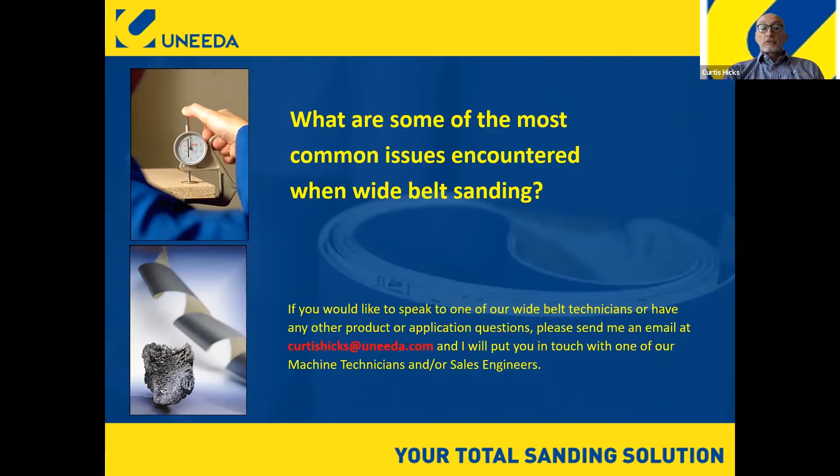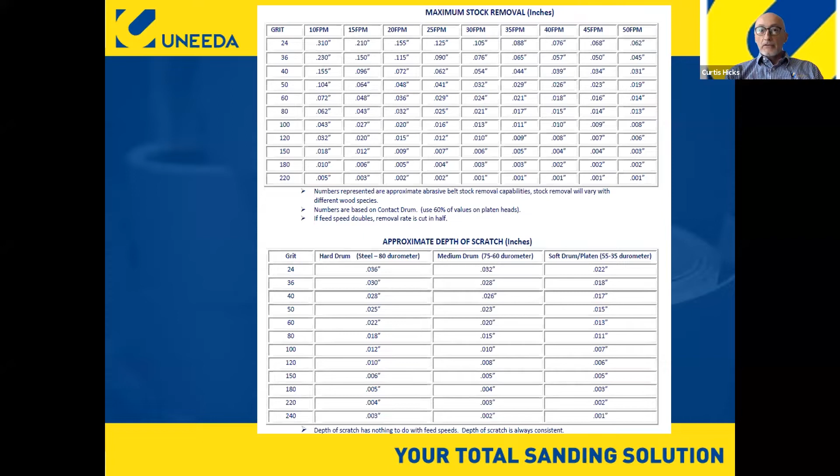So that's what I want to show you first, was the stock removal. So let's get into the issues people run into.

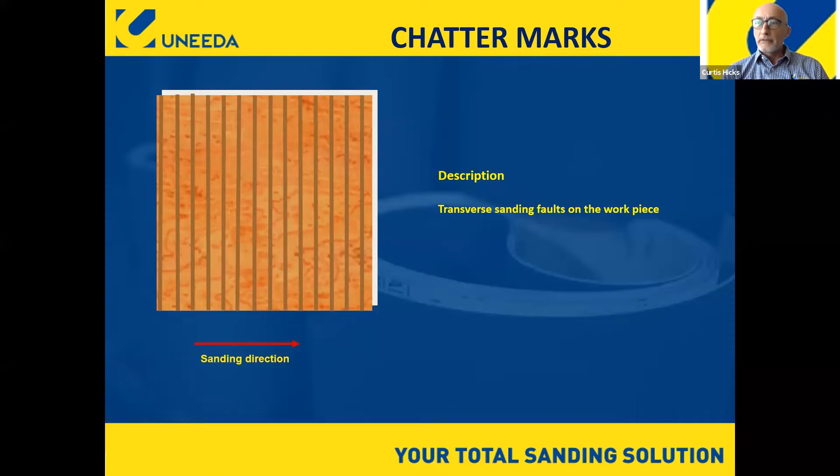So chatter marks are what we're going to address first. On some of these slides I'll spend more time than others — some of these sanding issues aren't as common, so I won't spend as much time on them. Chatter marks are typically going to come from one of two things 90% of the time: number one, it's either a belt joint or you've got a machine issue. So your first objective is to determine, is this a belt joint or is it a machine issue?

So the very first thing I would do if I'm seeing chatter is check my joint. Now there's two types of joints. You have butt joints, where you simply butt the material together and then put a piece of tape under it — that's actually the type of joint we prefer to make. We also do lap joints, where you basically glue the top of the paper onto the other. To get a zero tolerance there, you're scuffing and skiving the back so that you do get a zero tolerance.

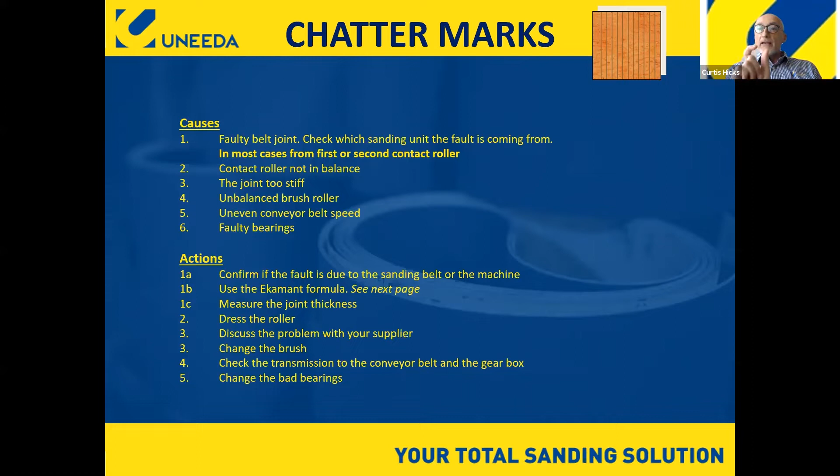But the first thing you want to do if you're getting chatter is measure the belt where there is no joint, whatever that comes out to be, and compare that to the measurement at the joint. You can have a thick joint whether it's a lap or tape. We do a good job of making tape joints because you're creating a channel in the back of that material to lay the tape in, so you should get a zero tolerance, maybe 1 thousandth. But if you measure that joint and it's 3 or 4 thousandths thicker than the material, that chatter could very well be coming from the belt joint.

The next most common issue with chatter is machine related, typically bad or faulty bearings. You'll see some other items listed here — I'm not going to get too much into those, like a joint being too stiff, that's possible, or an unbalanced brush roller, which can cause chatter. But I'm going to stick to the two most common causes: a thick joint or bearings in a machine.

Now there's an easy way to figure that out and a hard way. If you can adjust your feed speed on your machine — let's say you're running 25 feet a minute and you want to find this out quickly — if you speed up or slow down your feed speed, you're going to quickly see if it's a belt joint problem or a machine problem. If you're running 25 feet a minute and slow the machine down to 20, that belt chatter is going to move — it'll get closer because now the joint is engaging that part more often. Conversely, if you speed up to say 35 feet a minute, that chatter is going to spread out and move, because now you're not coming in contact with that part nearly as often.

If you do that and it doesn't have any effect on the chatter, then you can almost bet you have a machine issue, because the machine issue is not going to change. No matter what you do with the feed speed, if you have a bad bearing and that drum is sitting there bouncing on top of that workpiece, it doesn't matter how fast or slow you run it — that chatter is going to stay the same distance. Typically, machine chatter is tighter than belt chatter.

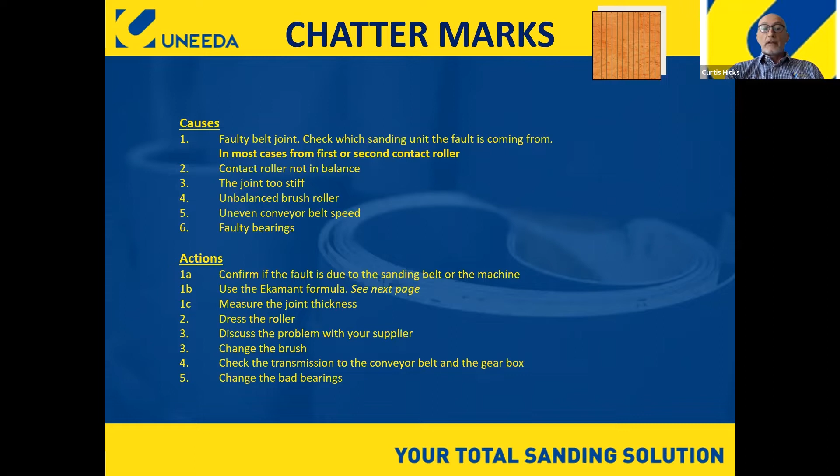So you get these two numbers, and whichever one is closest to the distance between these chatter marks tells you whether it's a belt joint or a contact roll. If it's a belt joint, odds are every belt in that box is probably similar, because typically when you set up to run belts and make them, whatever issue one belt has, most in that run will have it, because the machine's been set up once and you run the belts.

The biggest thing to do there is if you're getting a lot of belt chatter, you really need to contact your supplier and work with them to solve the issue. To be honest, from our standpoint as an abrasive manufacturer, we would rather see that the issue for you is a belt, because that's easy for us, or your supplier, to fix, compared to bearing issues or possibly a drum that needs to be dressed. So we're hoping for you that if you have chatter, it's from the belt.

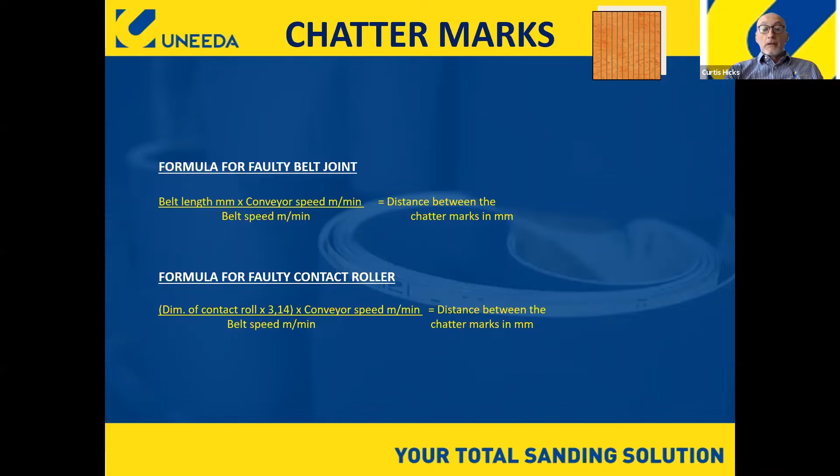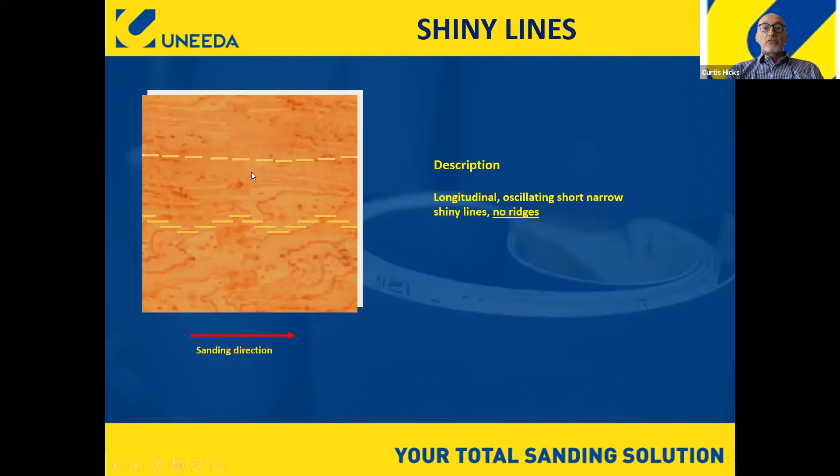The next one is shiny lines or longitudinal marks. Let's say they're oscillating, narrow shiny lines with no ridges, which means they're not raised. Now, lots of things can cause that—if you notice, they look almost like stitches. There's spaces between them, and these are kind of straight, but they are moving a hair bit. These are definitely oscillating. It could be small spots of the belt clogged from glue, resin, dust, lacquer, maybe the result of your air blower not working correctly.

You may not even have air blowers, so for those of you who do, you want to check those. And to be honest, air blowers on most machines are the first thing to go out. I don't know why—regardless of the brand, that's what we find to be the first thing on a machine to go out.

In that case, really the best thing to do is change the belt. You should see the issue go away. What we always recommend is when you have issues, shut your machine down, open up the doors, get your belts out, and do a good inspection of everything. Obviously, if you see glue build up on the belt, it's not hard to figure out that it's time to change the belt to get rid of these shiny lines.

Now, something I have here is static. And this is something I really want to talk about, because most people don't really understand it. Most people don't even realize it can be an issue. So we deal with static a lot.

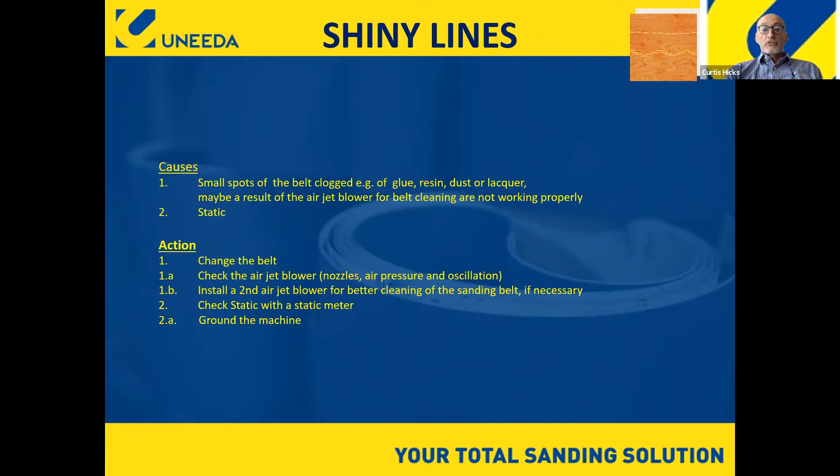Static is typically not as big an issue in the South where you have a lot of humidity. It's really when you'll see static issues rear their ugly head when there's a weather change and suddenly it gets dry or cool. Now there's not a lot of humidity in the air, and suddenly dust wants to stick to everything. These are actual pictures of static I chased for a week at a place. I hope you can see the pictures okay—they look like stitches, I've got them circled.

In this particular case, they're relatively straight, but I changed the belt on this and gave it 10, 20 minutes. In this case, it was really bad—that static would jump all over the place. You might see some over here, it might pop up over there. Static is very strange in that sometimes it's raised, sometimes it's not raised, it's flat.

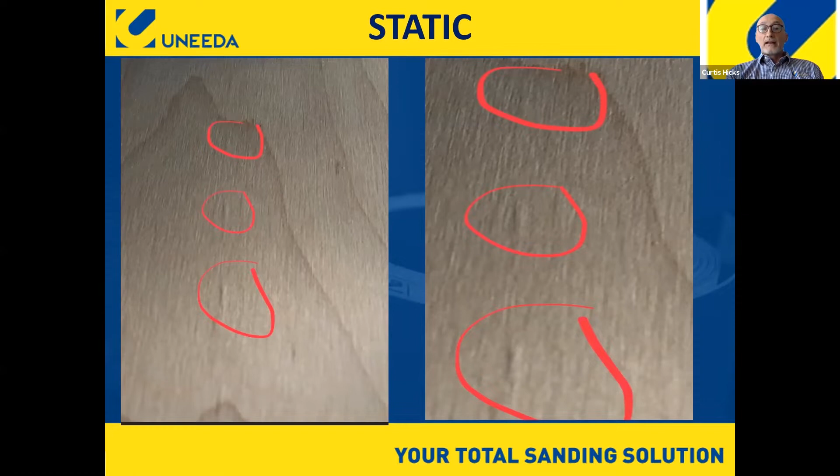A lot of people really scratch their heads trying to figure out what is going on. So to combat static, there's really one good way to do it.

You need to ground your machine, and you need to ground it directly to the bed near the last head. Now, a lot of machine manufacturers, God bless their souls, they're great people and they definitely know what they're doing, but a lot of them will say you don't need to ground your machine, it's grounded through the wiring or what have you.

That may be true, but look at this too. You have anti-static belts on your machine, your conveyor is supposed to be an anti-static conveyor belt, but you're still getting static. The fact of the matter is you cannot ground your machine too much. If you could ground it in 4 or 5 different places, so be it. It's not going to hurt anything. But if you have static, the best thing to do to help eliminate it is ground the machine.

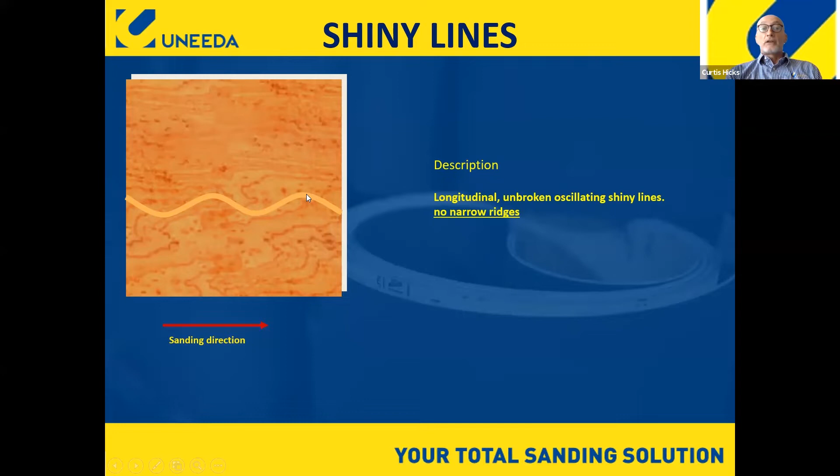So shiny lines, again, you might have narrow parts going through the machine that's clogged up your belt in a certain area, may have even killed the grain in an area that's made it where it's kind of leaving a shiny spot. Could be the result, again, of the jet blower not doing cleaning properly.

So on those number one issues there, you want to change your belt, check your air blower, install a second air blower if you've got money to spend. Never can have too much air blowing going on to clean your belts.

But number two, and this is one I really want to talk more about, is check your graphite and your felt on your platen, but most importantly, your graphite. We are very surprised how many places we go and they just run graphite and don't realize that it's worn out. They're getting lines. And let me tell you, if I had a hair, I don't, but I've seen hair get under graphite before.

Just a hair, which is so minute and small. Every part that went through that machine where that hair was under the graphite bled right through to the part, and you could see that line. Anything that's defective on your graphite, in many cases, because this is on a platen, will transfer right through and show up as that look on your part.

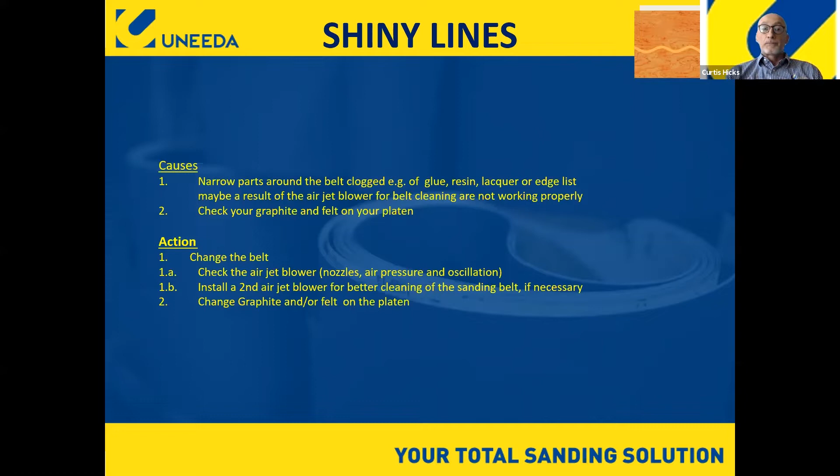And again, anytime you see an issue, one of the first things you want to check is your graphite, no matter what the issue is. So many problems can be solved simply by changing graphite or repairing it like you see here. So graphite is a very key aspect in wide belt sanding on the platen, and you won't see graphite anywhere but a platen.

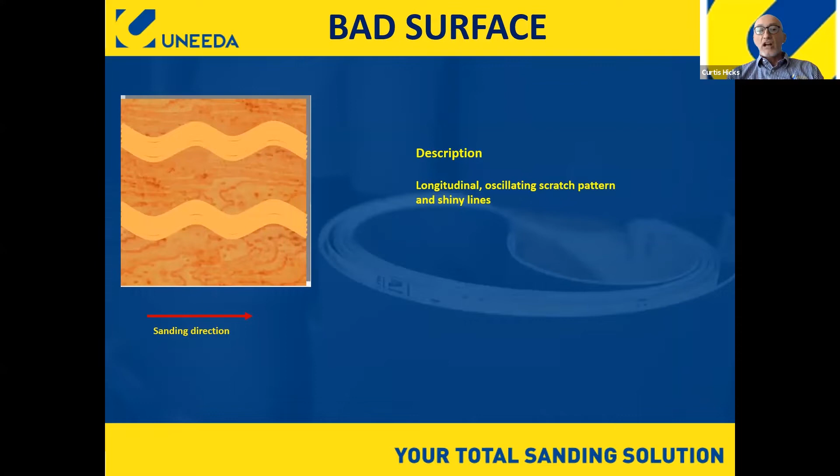Bad surface, so what you're seeing here are some thick, wide lines, oscillating scratch pattern, shiny. Again, you're gonna most likely see this on your belt. It's probably clogged, you might have glue on it, starting to look burnt a little bit in that spot. Also, too big a stock removal or too high sanding pressure can cause this issue.

Now, we are very adamant about belt tensions and sanding pressure. Not everybody's probably using our belts, and there's lots of good sandpaper out there. Our brand is Ekamant. That's the only brand of coated abrasives that we sell for wide belt sanding, and there's a very big reason for it. It's because of the fracturing of the grain and the way they're designed.

What happens is you start out with a very sharp grain, and as you're running it, that grain is going to naturally crack and resharpen to more sharp tips again. Now, some sandpaper starts out sharp, it cracks and gets dull, and that can certainly cause an issue.

But belt tension to us is very important. We recommend that you run under as light a belt tension as you possibly can. Now, some older machines use air pressure, only have one air pressure adjustment, and it handles your tracking and your belt tension. That doesn't leave you as much opportunity to adjust that.

For us, we want to run under as light a belt pressure as possible, about 3 bars, so 40, 50 PSI. You may have to adjust a little higher. And I wouldn't really trust your gauges. What we do, we open up a machine, we don't even look at gauges, we reach in and squeeze. Like on a platen, you grab both sides of that and squeeze, and that cylinder at the top should move relatively easy.

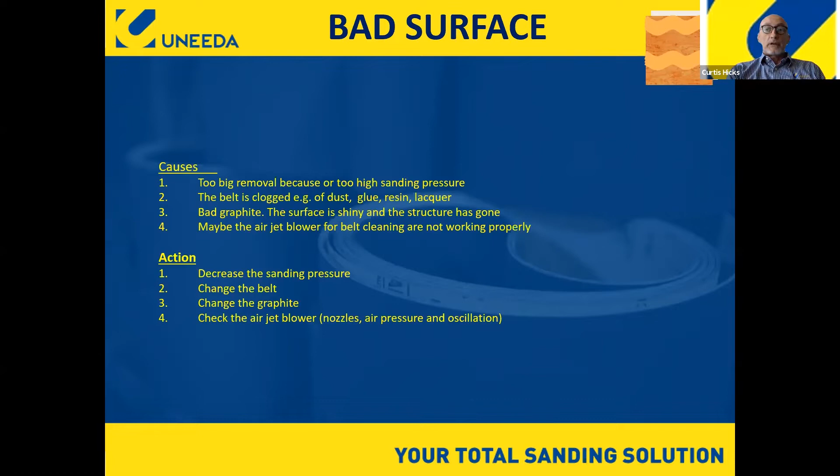Okay, ridges. These are raised lines. So longitudinal, short, and narrow oscillating ridges, sometimes only following the oscillation in one direction. That could come from a lot of different things.

Too big a stock removal can sometimes cause this. Poor dust extraction, and what happens there, if you don't have good dust extraction, you'll get buildup of dust in certain areas that's causing that skipping look. The reason that line is raised, if it's due to dust, is that dust has piled up so much that you're not getting any cut from that piece of the grain. So the grains around it are cutting, and that one is not, so it leaves a raised part of the wood. So sometimes you want to decrease your sanding pressure, you may need to change the belt.

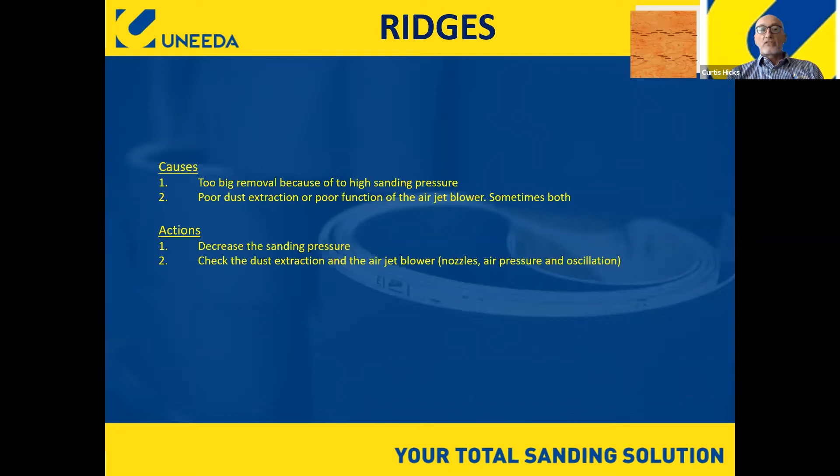Longitudinal, unbroken, narrow oscillating ridges. This is best known to everybody, and we've all experienced this as a raised line. This is next to chatter, probably the second biggest problem we run into, static probably being the third.

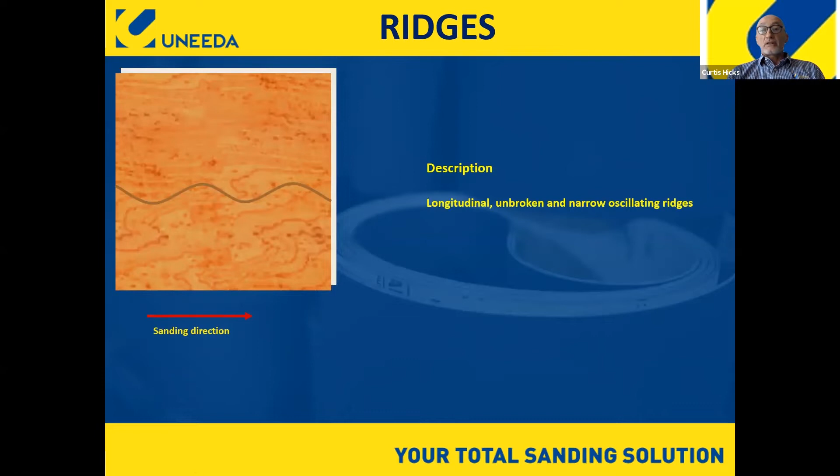This is quite simple. If you see this line, the abrasive grain has been damaged by some type of foreign particle in the workpiece, which typically when we see raised lines, at least in the States, is because a lot of people will pin their stiles and rails together, their doors together, to get the glue, so it sets up and holds the door together. What happens is sometimes those nail guns are pinning it a little deep, and you may not get it until the second or third head, but eventually it's exposing that nail or that pin, and that's breaking the grain on your belt. I don't care what you do, there's no solution for that other than changing your belt.

Unfortunately, once that grain is broken, you will always get a raised area, because now you have no grain there to cut it down. So you're cutting all the wood down beside that area, but you're leaving that one high spot. What we find in our industry, typically the backs of doors are not as critical for raised lines. People will accept a certain amount of that.

When you start looking at the face of a door, it's a big defect that's a problem. One thing we're starting to see is more companies trying to get away from pinning if they can. You just have to get ahead of it and have good glue racks. Pins are only there to allow the glue to set up, but people might want to run their process before it's really cured well. So if you can get away from pins, it's good. There are composite pins now that are sandable. They're not bad, but they're expensive as they can be. And sometimes, like with hickory, you can't pin very well because it's too hard. Just keep an eye on your pins and do a good job keeping your guns in good condition so you don't pin too deep.

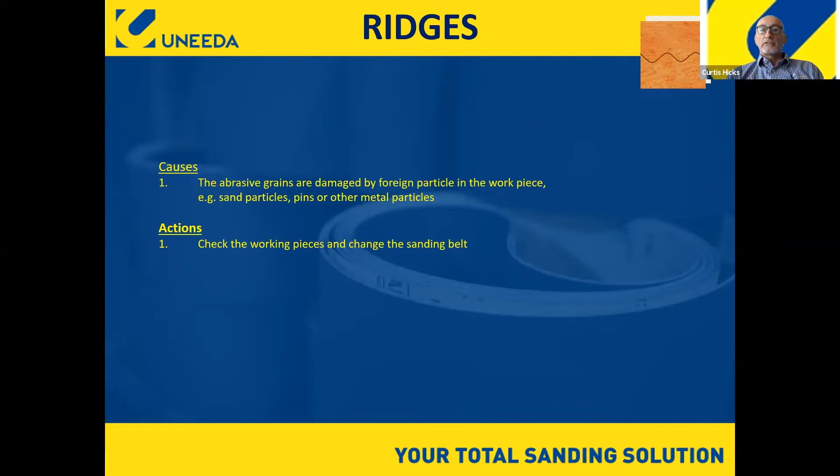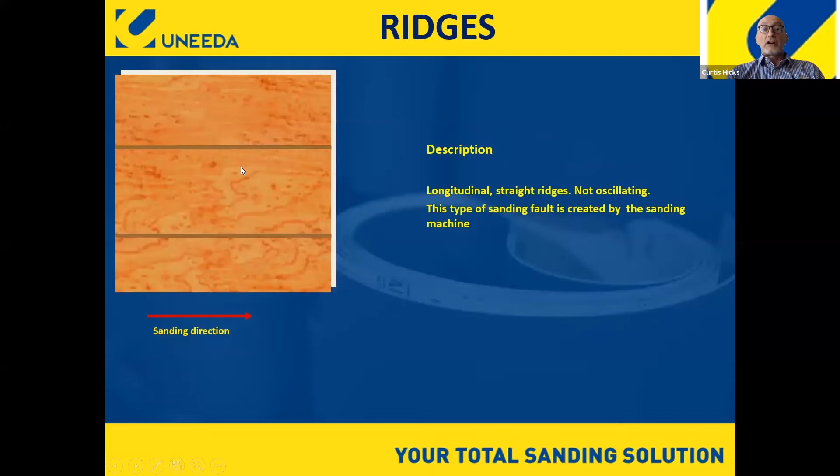Longitudinal straight lines, not oscillating: 99.999% of the time you have a machine issue. That's not coming from sandpaper. Sandpaper will always oscillate. So the contact roller could be damaged, which could cause a straight line, or the graphite could be damaged. I don't really see that typically as an issue that would most often leave a straight line.

One thing is, on a lot of machines, in order to hold the wood down, you're either using a roller or some machines have shoes in them. They're thick metal, wide metal shoes that are basically level with the sanding head. Over time, those shoes will get a little burr of metal, and that will put a line into your machine. Actually, I take that back - these are raised lines. If it's a shoe, it will actually be a depressed line because it's cutting into the wood. So if you're seeing these raised lines, you really need to check your contact roller out - odds are something's going on with that.

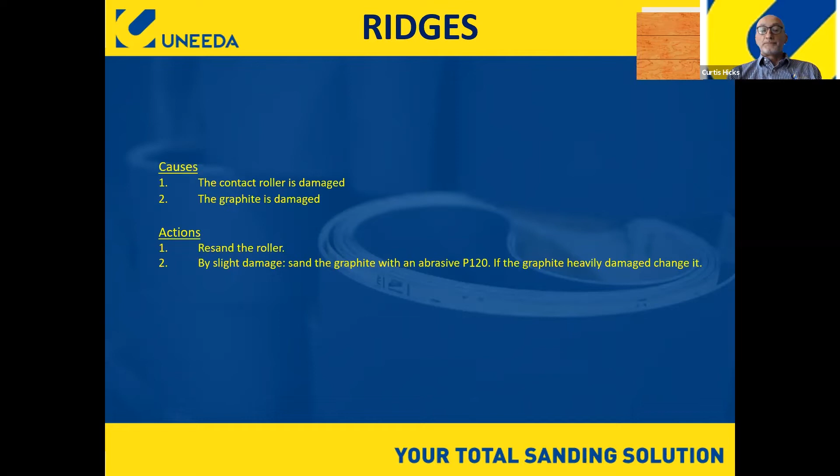Longitudinal short oscillating scratches - again, that's going to be coming from a belt, coarse grains in the sanding belt. I have to take my hat off to Ekamant - I've been with the company 18 years, and I've never heard this before, but what they're calling coarse grains is called a wild grain. If I understand it correctly, the wild grain gets into your belts because of the cleaning process of the makers. So let's say you're using a 180 grit belt, and they ran a batch of 120 grit on the maker where the stuff's actually coated to the paper, and there's some 120s left in there. So you've got this belt with your 180 grit grains, and in some areas you've got a much larger grain, a bolder, more aggressive grain in there. That's causing a different scratch depth.

Sometimes that works itself out, because as those grains crack and break down, they'll even out. A lot of times when you start up your machine, even with wild grain, when you start staining, you'll see dark and light scratches in your finish. Those darker scratches come because you've got some wild grain in your belts - some areas sanding a little deeper than, say, the 180. Let's say you've got some 120 getting a little deeper in there. So obviously when you stain that, you're getting a different color, darker than the 180 grit would be. Not a lot you can do about that. If you get a lot of it, you really need to evaluate the sandpaper you're using. There are lots of good manufacturers out there, but there's also some that don't do as good a job of keeping wild grain out of the belts. There could be an impurity in the joint - I've even seen little pieces of shavings or metal from the wood get caught up in there, which can cause these ridges as well.

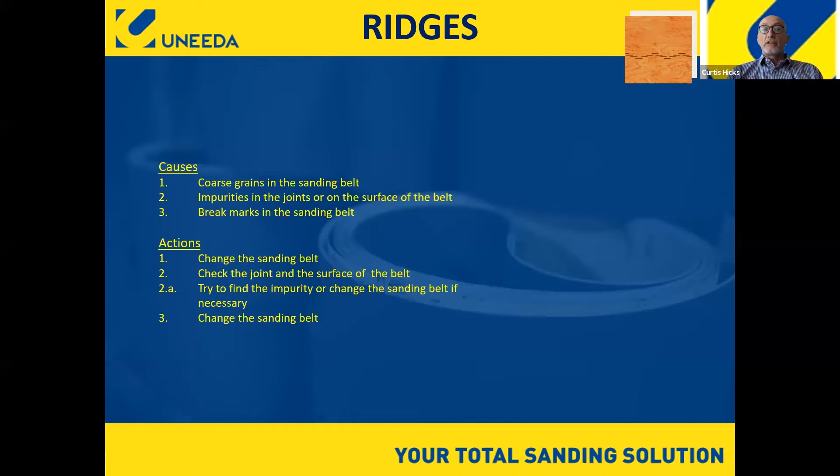Unfortunately, a lot of times the solution to that is changing the sanding belt. You check the joint, the surface of the belt - take a good inspection of everything to see if anything's lodged in it that could be causing that. Scratches or grooves, longitudinal, short oscillating scratches.

A piece of wood could be stuck in the pad or on a ridge of the graphite. What we see a lot of times is you keep getting this weird line and can't figure it out. We've even noticed sometimes when people have a belt bust in a machine, small parts of that belt that weren't cleaned out well may get stuck up in the dust vent. You can't tell until you really inspect it well, but it may be rubbing against your part as it's coming through, and that can cause some of these lines.

So it could be dust or resin buildup causing ridges on your pressure beams or pressure rollers. What they're talking about there is your hold down rollers. Machines that don't have shoes will have a hold down roller.

Let's say this is your drum, and here's your hold down roller. Hold down rollers should always be about 20 thousandths below the drum because they're spring loaded. So as you feed the part, this is holding it down, and it's going to kind of come up. But if this hold down roller has a lot of glue or buildup on it, it can certainly cause scratches or grooves in your workpiece.

So with that, you just really need to clean your rollers off and make sure they're in good condition. A lot of people don't pay a lot of attention to their hold down rollers and shoes.

Most people don't have the equipment we do. When our technician comes in, he's got digital indicators and can really diagnose your machine because he has all the equipment to do it. That stuff's expensive, and not everybody's going to have that ability.

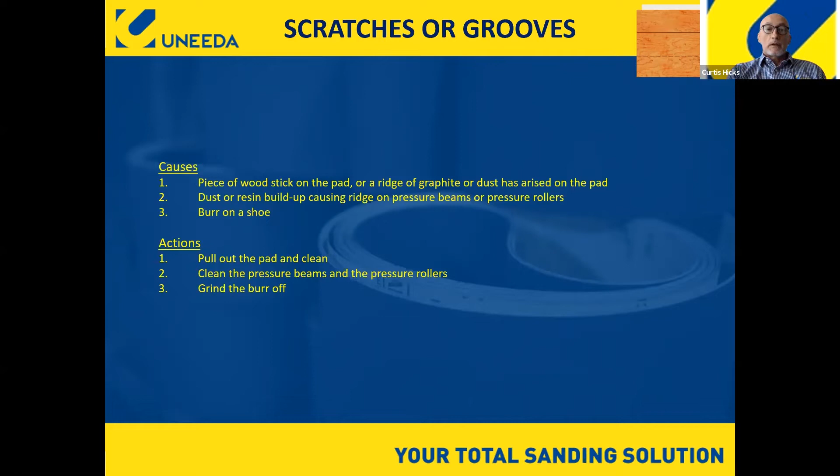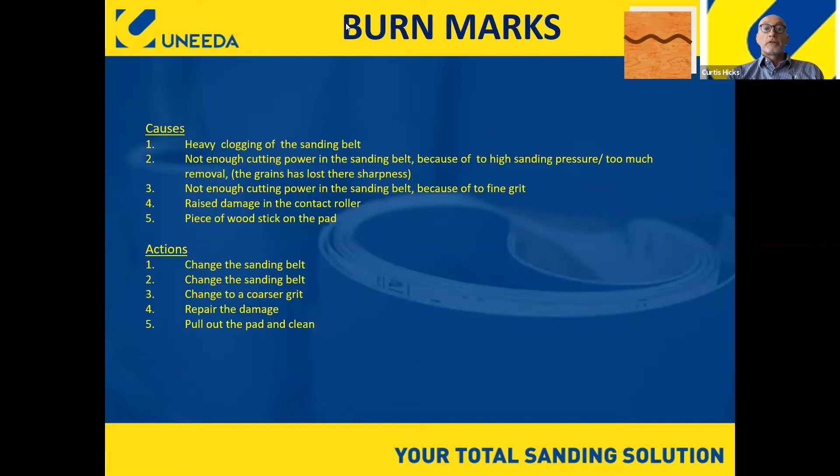Now, the next part of this presentation is going to be about veneer, and then we'll get into a little bit more about some belt issues. We'll get through the veneer stuff pretty quick because most everyone running veneer a lot is using a segmented platen - not a regular machine that has drums and a solid bar platen. So if you're not familiar with a segmented platen, just think of a piano.

So instead of having a solid platen bar, you've got a bunch of little bitty platens running all the way across this bar. And then what happens is you feed the wood into the machine and you're going to see these little rollers and they're about the same width as the little platens on the platen bar. Well, that's like a brain, it's a reader bar.

So you put a piece of veneer in, let's say this side over here is thinner than the side on the right-hand side. Well, that machine is so smart and it's all programmable. It's like a brain in there, and it says, hey, it's telling the platen, this side of the veneer is thinner than this side. So what's going to happen, all these little platens over here, just like a piano, they're going to fire down more on this side than the ones over here, because the brain has told them you can't reach this piece the way this one can because it's thicker over here.

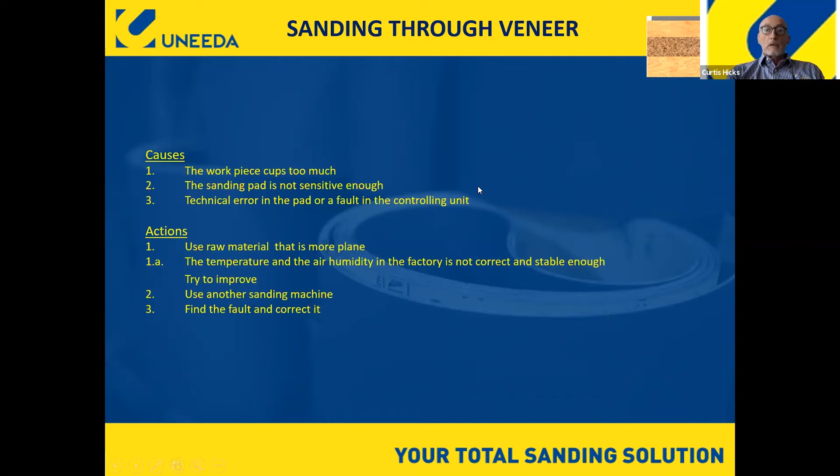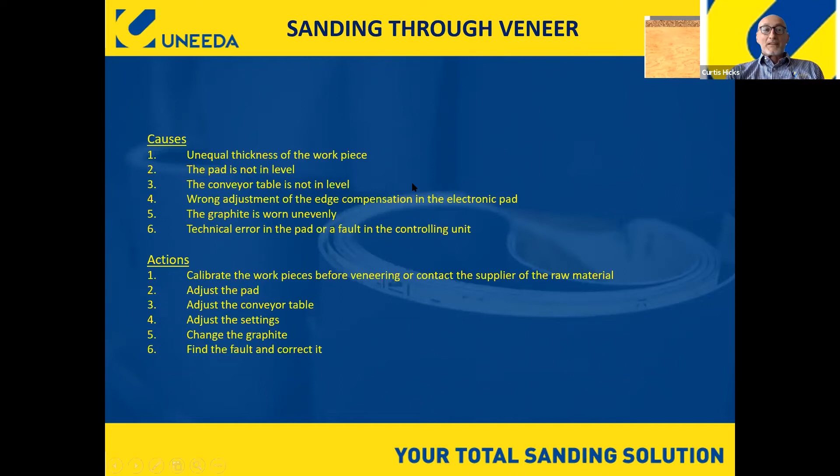So let's go to the next one here. Again, the veneer is sanded through on both sides of the workpiece. This typically goes back to your segmented platens, and in this case, they're firing too hard on both sides of the part, so the workpiece cups too much. Or it could be the other way, where the edges are higher than the center, so it's obviously going to cut the edges off deeper than it would the middle.

And it's going to sand through in this case. The sanding pad's not sensitive enough. Again, that's programming, making sure your reader bars, and also the little readers, the round segments coming in that read the veneer, don't have glue and stuff on them, because that can be a big issue too, since now it's not reading correctly. So it's very important to always check all of these things out.

On those little reader bars, on those little wheels, you're going to have a spring. Sometimes that spring will get caught, so it's very critical on segmented platens to really inspect your machine well and keep things up to speed and replaced. It's never going to fix itself if you got a stretched spring or a bad spring, or if you got glue on a roller. It's never going to give you a good result until it's repaired.

Use raw material that's more plain. In other words, try to use a material that's nice and flat.

Temperature and air humidity in the factory is not correct and stable enough. Some factories certainly pump humidity into their facilities to fight these issues, that's definitely an option. We always keep our smaller customers in mind that might not necessarily have those resources.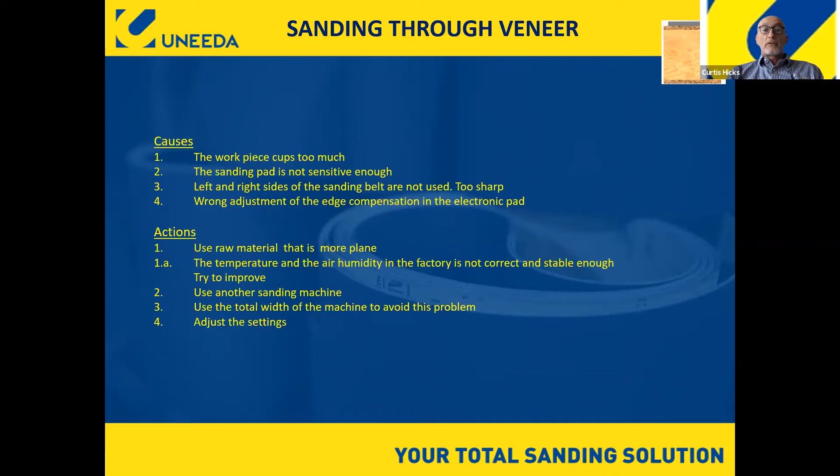The veneer is sanded through on the front edge. Now, when you start talking about segmented platens, you start talking about rise and fall. So what may be happening in this case, that machine is programmed to take that once it comes through. It tells that the very first part of it when to drop those platens, the segments, and maybe it's dropping a little too soon, a little too far.

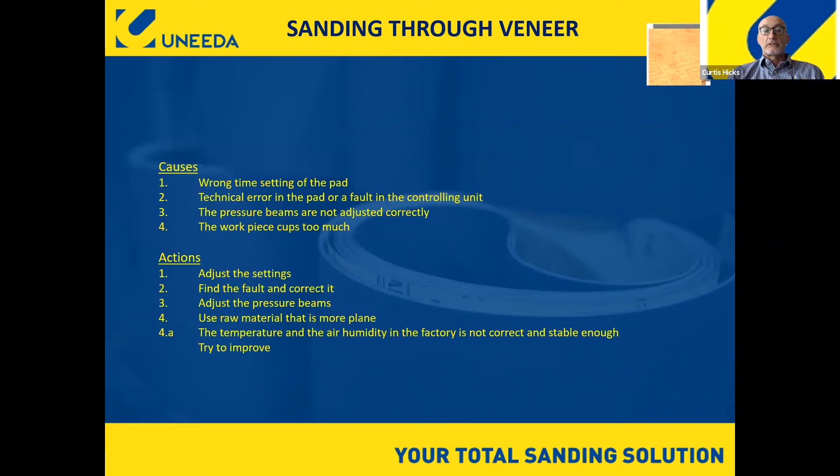Again, that's all programming, that's what you really need to take a look at. Wrong setting of the pad, technical error in the pad or fault. I know a lot of these answers are redundant because they're pretty much always the same types of issues on segmented platens. The veneer is sanded through on the back edge, exactly the same thing, just the other way.

In this case, they didn't pull the segments up maybe soon enough, or again, there may be too much pressure on that back end when it's coming through on the segments.

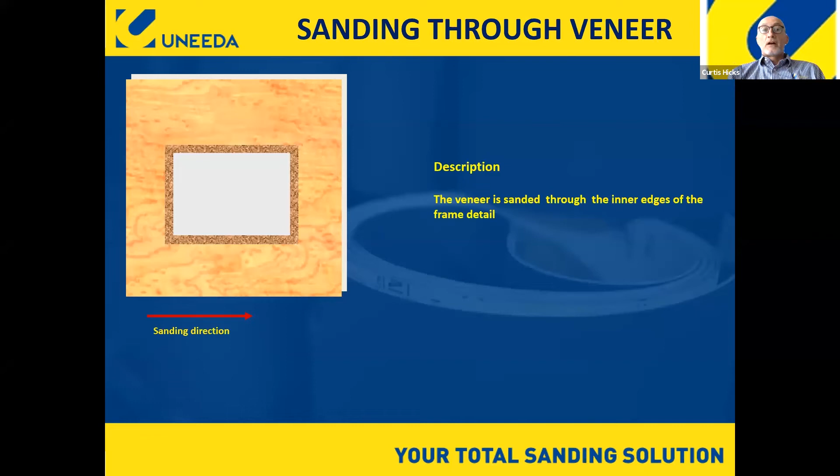Now this one, veneer is sanded through the inner edges of the frame detail. But I also want to address this with regards to, say, face frames. A lot of machines have a vacuum bed. Vacuum beds are great for holding solid pieces down. But if you are running face frames, you're going to see down at the bottom, and I'm addressing this because if people run into this a lot, it looks like a football effect.

Because what's happening is if you got face frames, you got big spaces that are open. You got lots of little stiles and rails to build your frame. You got a lot of space in there. And what's happening, it's pulling the wood down, but then it creates a bend in that. So it's sanding harder in certain places.

So vacuum beds are great when you got solid parts, but if you start having a lot of doors with big windows in them, the best thing to do is cut that vacuum bed off, or you're going to see a lot of footballing effect where you're going to get deeper sand throughs in parts of that door.

In this one, they're talking about more back to the veneer, unequal thickness of the workpiece. Again, if it's bowed in the middle, it's going to cut through compared to if it's flat.

The vacuum in the conveyor table is too strong. A lot of vacuums can be adjusted because it's pulling that down and sanding harder in certain places. Maybe you can alleviate some of the vacuum.

Now, vacuum's important because that is what, in a lot of these more expensive machines, is what's holding that part down. It's very critical because like on a little drawer front, you might not have a roller to hit it to hold it down. So sometimes that vacuum bed really does a nice job of helping you achieve keeping that part nice and flat and getting through the machine.

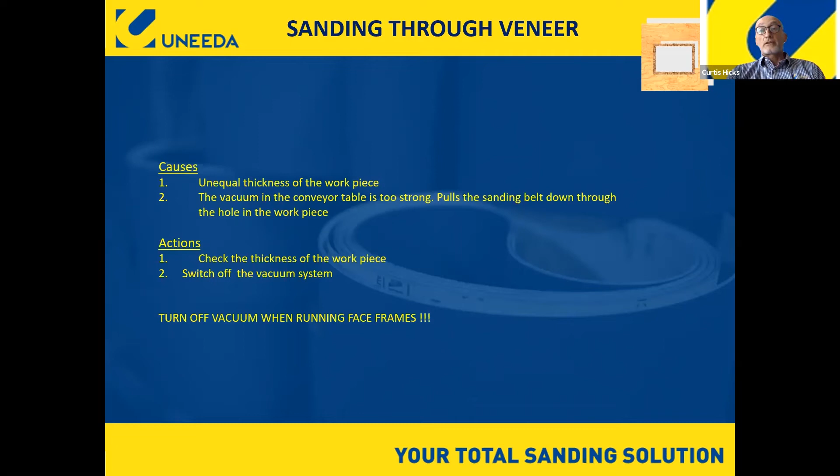Check the thickness of the workpiece, and again, switch off the vacuum, especially on face frames. I would never run the vacuum on a face frame.

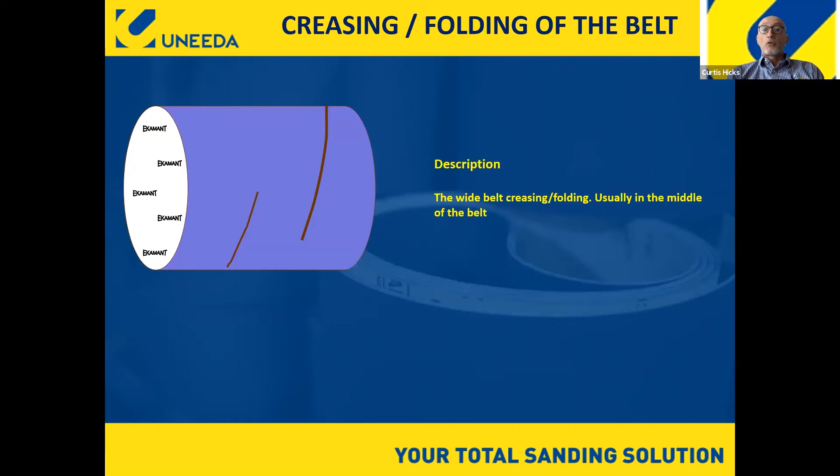Okay, we're going to get to a little bit of things about actual belt issues. We do see issues sometimes of the wide belt creasing or folding in the middle. Typically, there's going to be one or two things to address with this. Number one, again, belt tension is critical, it's usually the primary cause of this. If you've got the belt tension too high, that belt's not running across that roller, across your drums effectively, and it can tend to make it roll up over on itself.

It's almost like it sticks and rolls over. Sometimes not having enough belt tension can cause that, but it's typically due to too much belt tension.

We see situations sometimes where this comes and goes and everybody's scratching their head like, what's going on? But we found in some cases you might have a machine with a little bit of an air leak. So what's happening is you've engaged the head, and over a little bit of time you start losing air pressure. Once it gets below a certain point, that belt loosens up and it can cause it to roll on top of itself.

So you could have too high sanding pressure, incorrect oscillation, too fast in one direction or both directions. You need that oscillation to be very consistent. If it's doing this and then coming back slow, it can cause that belt to grab and roll up on itself. But I'd keep in mind most times in this case, it's too much belt tension or you're losing some belt tension at some point through this.

Again, unequal belt tension, when the machine has two cylinders on each unit for belt tension. A lot of machines have one cylinder that engages that head, sometimes there's two. Well, if one isn't at the same belt tension, it's going to get more tension here than here, and it can certainly cause a belt to roll up on itself.

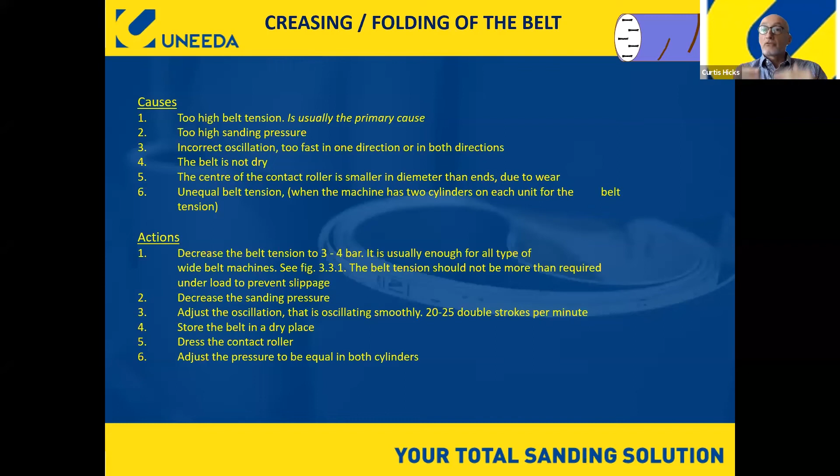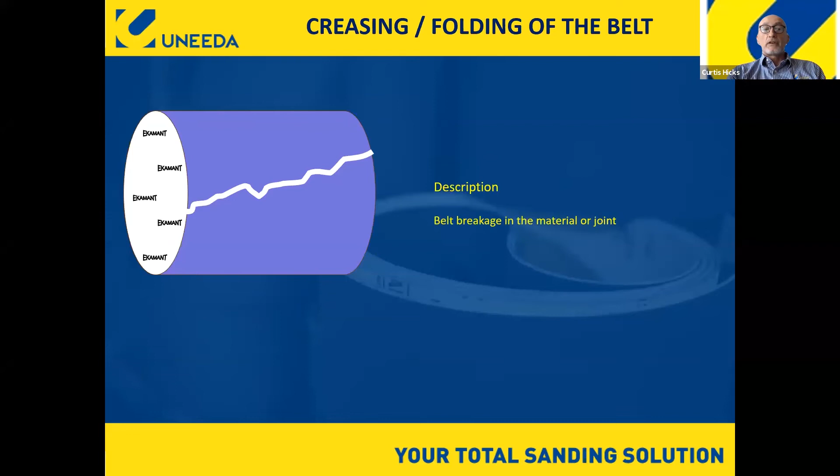Belt breaking in the material or the joint. That is certainly an issue a lot of people have, and it can be caused by a lot of things. A tear on the edge of the belt - I'm going to show you a really cool secret here in a minute how to fix that. A tear at the edge of the belt has arisen when the belt was put in the machine or under previous handling. Improper storage of the sanding belt causes them to become too conical or cone shaped.

Now what that means is this, especially with paper - and we recommend at our company to go to paper on a wide belt machine as soon as you can, if your machine will run paper. You may get some older machines that just can't handle paper, they don't track well enough. But from our standpoint, we only put cloth on a head if it's absolutely necessary.

Let's say you're building a 5-piece door and your stiles and rails aren't real level, so you've got a 20 thousandths difference between your stile and rail. You probably want cloth to hit that, to cut it down - it may be too much of an impact for the paper and may bust it. But from our standpoint, you absolutely always get a much better finish out of paper than cloth.

If you take cloth even in a 220 grit and hold that door up to the light - I don't care if you go 220 or however fine you want - you're going to see a little bit of a railroad mark running through that part. Not to say it's even going to show up in your finish, but you look at the light and it's there. The reason that's there is because of the weave of the backing. That's what's causing that mark.

Well, paper is - when you coat abrasives to paper, it's nice and flat, pressed flat, and just gives you a beautiful finish compared to cloth.

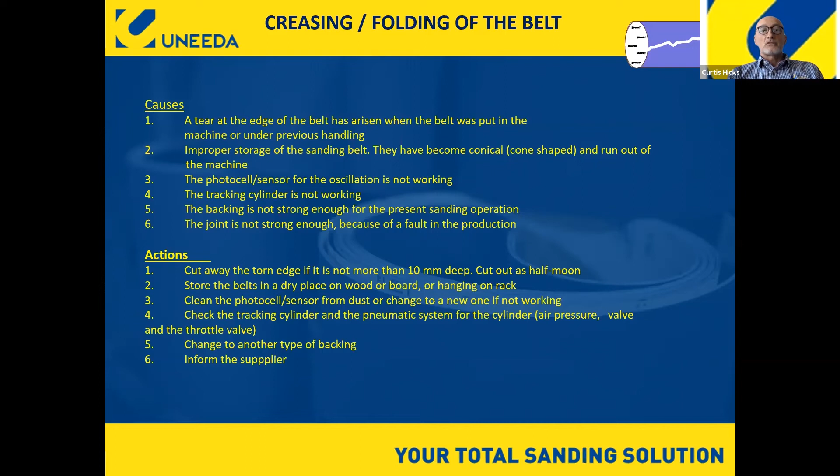I want to show you how to repair the torn edge of a belt. This can save you a lot of money. And I have to be honest with you, I've always assumed people knew this, but I can't assume anything. People could have been in this business 20 years and not realize what's going on with their paper belts.

So a lot of times when people are hanging their paper belts, it's very sensitive material. They may push it all the way up onto the rack and put that little bitty cut in it just from handling it. We see this all the time. Now, that's just a little bit of a tear. When you put that on the machine, it's going to run for a little while, but it's not going to be long before that tear takes off and just blows up in the machine.

Now, like I told you earlier, if it were me on my machine, I would have a placard. What we do for a lot of our customers is send them a PDF, they print it. You go to Staples, they have 8x11 magnetic sheets that you can print on, run right through my printer here at my house.

And then we laminate that and you stick it right to the machine. This is the other document I would have on every machine. And I would tell everybody to look at this and to understand how to do it, because this is a simple fix. What you see here first is the little torn edge.

So what we're doing here, we're taking a pair of scissors, a utility knife, whatever you have to work with. I've even seen people take a really sharp putty knife, but obviously scissors or a utility knife's better. So what we're simply doing is cutting a half moon. It's got to be a half moon. You come here and you got to get below the tear.

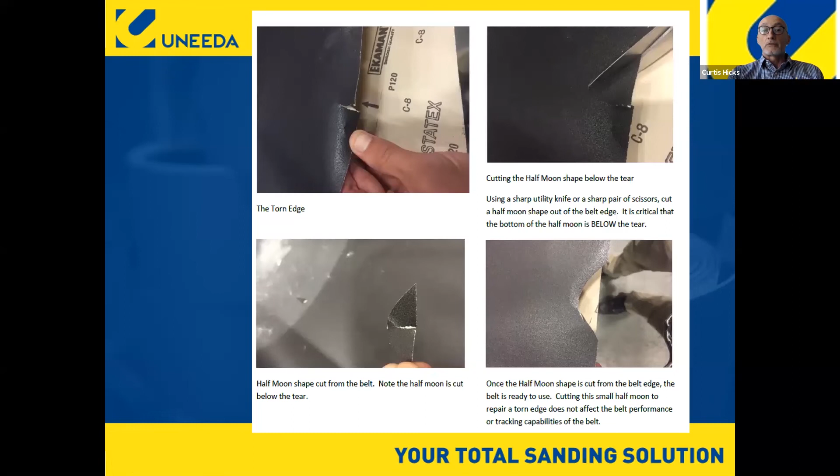Okay, the belt is flapping. You know what? I'm sure a lot of you have seen this. You see it's nice and tensioned over here, and over here it's doing this.

Improper storage of sanding belts is the number one cause of that. You're putting paper on the floor, one side of that belt sucking up the water, and all of a sudden you're getting a floppy belt on the machine.

High air humidity variations, that can certainly happen. We have a product called ARKF02, and a product called ECA 1000, two of our number one selling paper belts. We have one account whose plant was basically built almost on top of a lake, in a very southern area of the country, and there are times of the year the humidity is just, you can see it in the air. So at those times of the year, they like the blue belt, the ECA 1000, because of the longevity. It's a great product.

ARKF02 is an awesome product, especially for finish, one of my favorite products for finish. But there's a difference in those belts. The way we do the anti-static in those belts is different. The ARKF02, because the anti-static properties are in the resins, doesn't cup very much. You can put in lots of humidity and it just doesn't soak up the water and cup like the ECA 1000 will, because the ECA 1000 has a different process where the anti-static is put in the back of the belt. Both properties work fine, but we found that in a very humid environment, ARKF02 tends to handle the moisture better. So believe it or not, this customer, during certain times of the year, we switch them to ARKF02 till the humidity dies down and goes away, and then they go back to the blue belts.

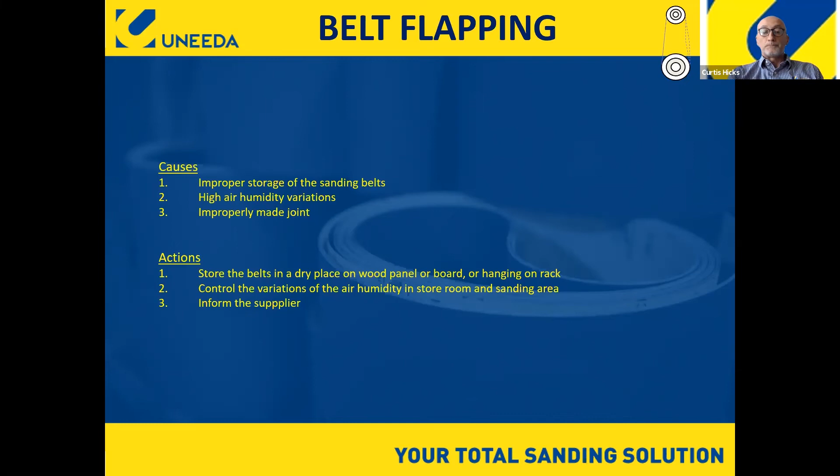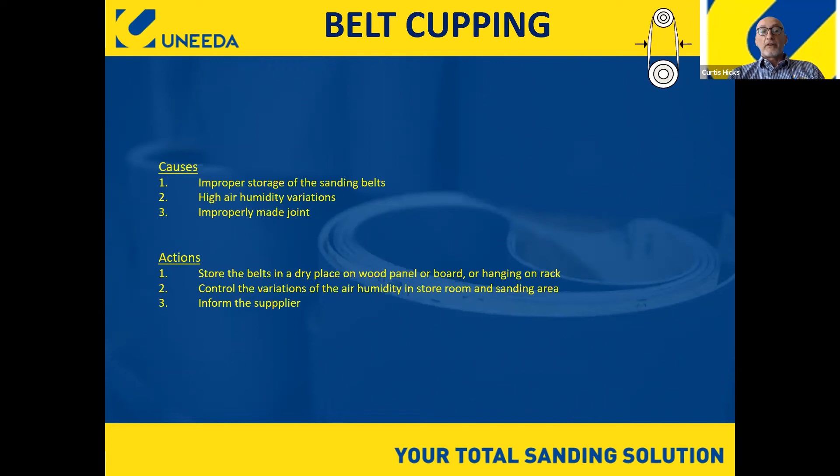The sanding belts have a tendency of cupping - that's where they're folding out. And again, that's almost always humidity, we've already covered those areas. Better storage, if you can store them in an area where you keep them dry, and then quickly get them on the machine and get it running, will help. Don't set them on the floor. And that's really your only options there - try to control the variations of the air humidity if you can.

The lifetime of the belt is short - we hear that sometimes. That's a very relative thing. There are reasons for that sometimes. If you're sanding with too much pressure, it's obviously going to kill that grain quicker.

Because the reason we like to have light belt tension is so that when you squeeze it, that cylinder gives. You've got to think, when you're feeding a piece into the machine, there's quite a bit of impact on that drum coming in. You hit it, and if you've got nice light belt tension, it gives that drum a little bit of movement.

So instead of coming in and just hitting something that won't move, you're hitting something that gives you a little bit of cushion there and it moves a little bit. So it's going to help lengthen the life of the belt.

Bad dust extraction, and listen, we see this all the time. Our technician carries a dust extraction meter. It's very nice, it's Bluetooth to his phone. And there's nothing in our lives that make us feel worse than telling somebody that their dust extraction system just isn't very good, because you're telling a person that they got to go out and spend a ton of money typically to fix that. And that's not always a solution for people.

You could have a bad air jet blower cleaning system. Wrong grit combination can certainly cause short belt life. Again, some people, they do the math. You got to do the math. You got to figure out how much stock removal you can get from your abrasive setup.

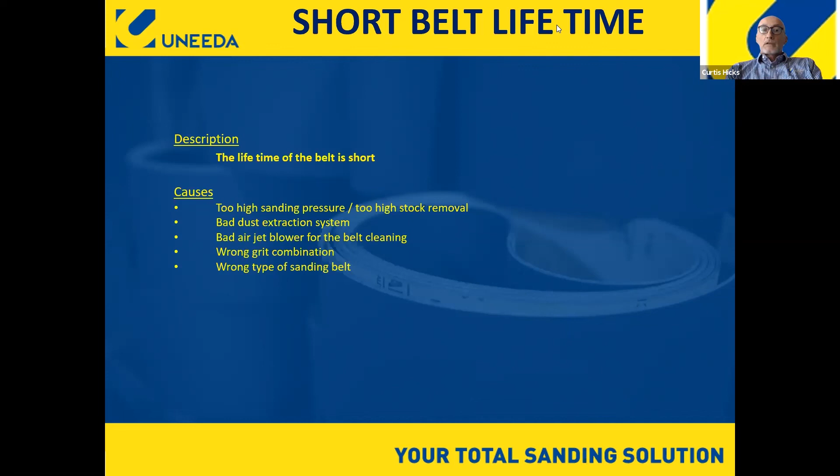All right, sanding belt runs off the machine. This is almost always a tracking issue. Photo cells and sensors—the light is too strong and is going through the belt. So especially on paper, sometimes that light is set too high and it will cut right through the belt, so it's not able to see that the belt is coming into the zone where it hits that sensor. The tracking cylinder is not working properly, it's not adjusted properly. We see this a lot, people don't realize it—that cylinder is not engaging, it's not getting all the way up. Maybe they've lost belt tension, or maybe it needs a new cylinder. So if you're not getting the right amount of tension, that can be just as bad as having too much, and it can cause that belt to track off. Improper storage of the belt, again—if you store it on one end, it's going to swell, become like a cone shape, and it's almost impossible to get it to track and stay on the machine.

Improperly made joint, I'm going to get to that in just a second. Here's the quick evaluation to do, especially with tape joints, because tracking is sort of like chatter. It's either coming from the belt, typically, or it's a machine issue. The machine issue could be the sensor, or it could be a lot of things.

But the way you quickly find out is if you have belt tape joints, especially, which we prefer to make. We certainly do lap, but we like tape better. And I'll tell you one reason why too: when you run a lap joint, you're gluing one end of the belt over the other. So if it's like this, your direction needs to be feeding to where this part of it is going through the machine, because that's the smooth part.

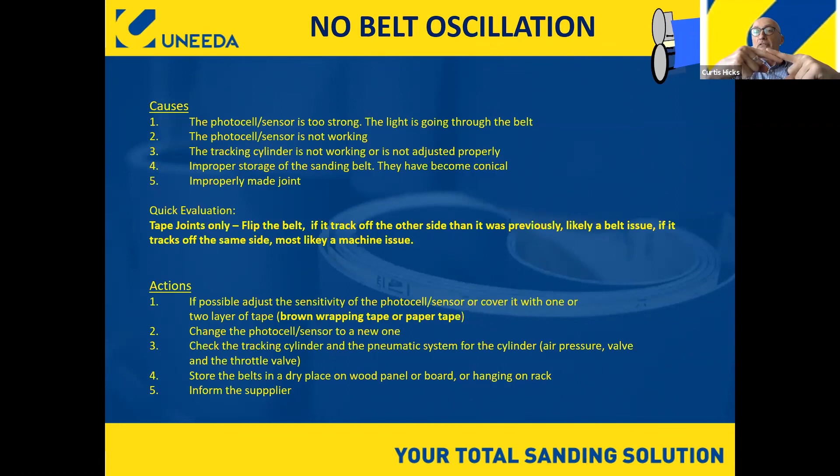If you don't have the belt in the direction of the arrow it suggests, this piece here is liable to catch and pop that belt joint off. Even on our tape joints, we have arrows, but you don't have to follow those on a tape joint - it's universal, you can flip it either way. We print the arrows at the factory because we don't know what kind of joint we're going to make with it until we make it. But on a lap joint, you need to follow those arrows.

One reason we love tape joints and really push people to that is it's great if you've got really sharp people in your shop - unfortunately, that's not always the case. It helps people who make a mistake and put the belt on the wrong direction, because then it doesn't matter. If you have somebody that doesn't understand what they're doing and puts that lap joint on the wrong way, you run a much bigger risk of busting that belt. Tape is idiot proof - it doesn't matter who puts it on or which direction, it's going to run the same either way. But if you want to evaluate for tracking issues, here's a quick, simple way to do it.

You take the belt and you put it on. We're going to say the side you open the door on is the operator side, the other side is the motor side. So let's say you put that belt on, fire your machine up, and off that belt goes to the operator side - it tracks right off, cut your machine off. Take that belt out, flip it, put it back on, turn the machine back on. Now, the first time it went off the operator side, and this time it comes back to the machine side.

90% of the time, that is because the belt is out of round - it's not been cut correctly. If you put it on and the first time it went off on the machine side, and the second time it goes off on the machine side again, you can almost bet your money that's a machine issue. If a belt's cut out of round, I don't care how you flip it, it's going to switch directions of which way it's coming off as soon as you flip it.

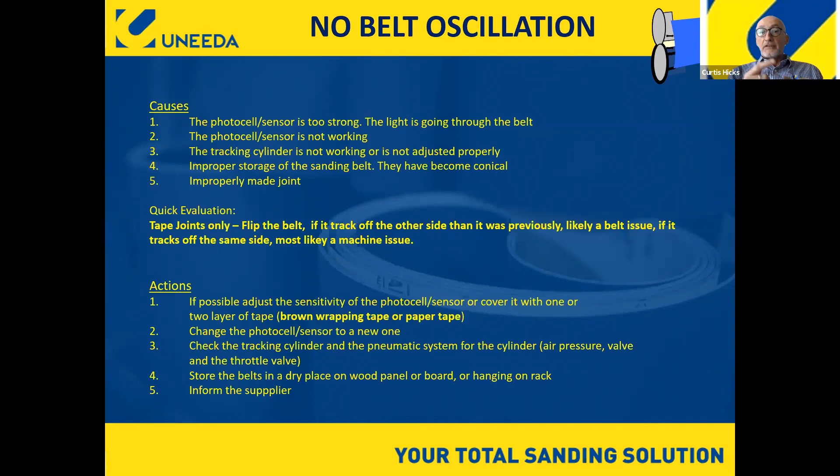So that's a quick way to check to see if it is a belt issue or if it's a machine issue.

Okay, the sanding belt's not oscillating smoothly. The tracking cylinder or throttle valves may not be properly adjusted or worn out. We've kind of covered a lot of this already. The air pressure is too low - those are things to check.

Again, improper storage - I know a lot of this is redundant. And too low belt tension. I can't stress how much belt tension is critical. You don't want them too terribly tight. They can't be too low, but we'd always err on the side of lowering the belt tension in most cases rather than having it too tight.

It really will help. It's not only good for your belt life, it's also better for your machine. If you think about it, if you put a belt on at 100 PSI and you can't even squeeze anything out of it, think how much it's wearing your rollers out.

And I don't just mean your rubber roller on the bottom. Our tech is really good, and you'd be surprised how many times we go in and everybody's looking at that contact roller when Tony says, you know what guys, your problem's not that contact roller, your problem's this idler roller. You don't think anything about it because it's not motor driven, it's just spinning. But that thing can get worn out like anything else.

You can even get chatter because of the idler roller when your drum is fine, because it may be up there bouncing. So it's very critical to look at every component on the machine and isolate one problem first before you do any adjustments. You don't want to go in and make adjustments on two or three different things, because then you don't know what fixed it.

Let's see if we got a question here. Okay, this is from Anonymous attending. Well, thank you, Anonymous, we appreciate you being here.

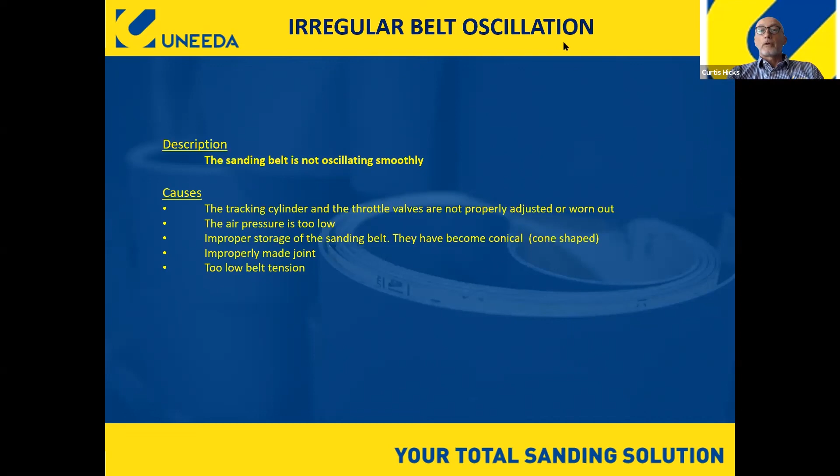So I know this is getting long, I think we're going to finish it up here. If the machine gets dusty, look at your dust extraction. Static issues cause that - again, if you ground your machine, it helps a lot. Use anti-static belts, that's very important to help with that.